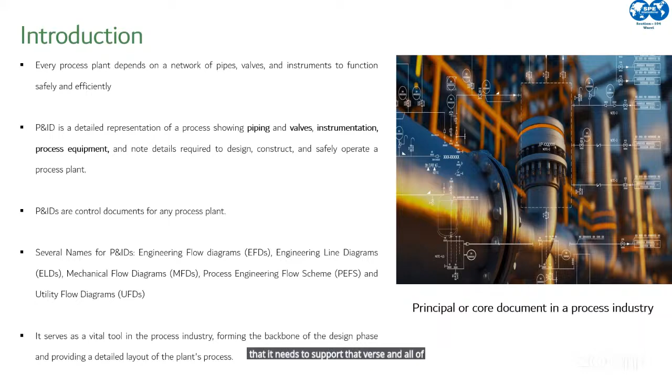One very important thing to note about P&ID is that they are often referred to as master documents, because if a change is made in a P&ID, every supporting discipline document may require revision. So most times in an engineering review, the process guy suddenly says we need to create an isolation valve for, say, a pump, and that changes your MTO, and changes what support the civil guy needs to provide for that valve. So they are master documents, like I've mentioned.

So when you talk about a P&ID, what kind of information do you find, do you include, do you hope to see in a P&ID?

So on a P&ID, you should be able to see basic operational and startup information, such as the normal operating flow path, and you're also able to see minimum flow protection.

Take, for example, on a P&ID, if you have a compressor, you're able to see a compressor anti-surge line. With regards to equipment capacity and rating as well, you're able to see what is known as an equipment tag number.

For example, if you have let's say 10 tanks, floating tanks, storage tanks in a refinery, on a P&ID you should be able to see tag numbers to differentiate them, like EK 101, 102, 103.

Also clearly on the P&ID, you're able to see the design pressure of equipment, what the operating pressure would be, the design temperature, the MDMT, the minimum design metal temperature, and also the maximum allowable working pressure where that applies.

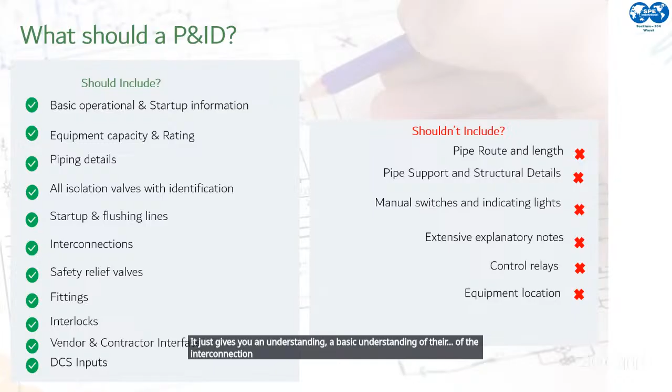So we're going to touch base on how important P&IDs are, and P&IDs are very much important in every aspect, from the design all the way to operation and maintenance of a plant.

During the design process, it helps coordinate interdisciplinary checks between process engineers and other disciplines, because this forms the basis for a line list - a line list that basically iterates all of the lines you have in the plant.

It basically tells you, oh, this line is coming from the inlet scrubber and is going to the heater. It helps as well doing HAZOP, what is known as hazard and operability studies, and also for safety reviews that are very critical to the design process.

For procurement, P&IDs provide control details, because from P&ID you're able to specify instrumentation and control details that are necessary for obtaining quotes. This information helps you in preparing what is known as a material requisition, or also a material takeoff. So they are very much important in procurement.

Doing construction as well, alongside other deliverables, they are very much useful in providing clarity, because even most times when you're constructing, few changes arise. You have, for example, a deliverable that has been approved for construction, and that deliverable is taken to site, and all of a sudden there are few changes that could arise.

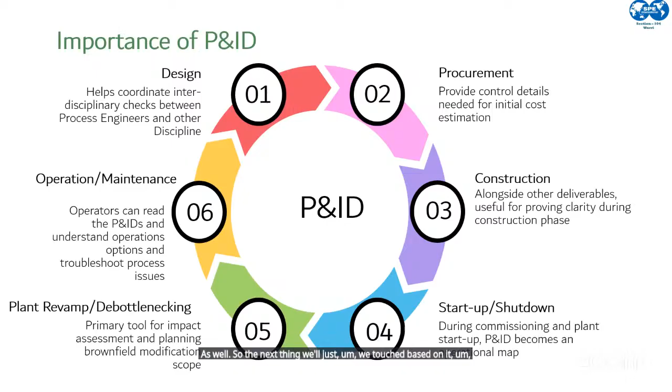So the next thing we touched on was communication, and why it's very much important. Most often than not, yes, the P&ID is a process deliverable developed by a process engineer, but it's not done in isolation. It's very much important as it serves as a communication tool where it brings the process, the mechanical, the instrumentation, and it brings everybody to the table, because P&ID is an input to every other EPC discipline.

For example, for a piping or mechanical engineer, it needs the P&ID to be able to develop a 3D piping model. It needs a P&ID to develop the ISO drawings that will be useful for fabrication and construction, and also the equipment and valve data sheets.

For a process engineer, we'll take feedback from the P&ID and create what is called a cause and effect matrix. For the instrumentation and control, it will develop engineering drawings and also the logic narratives, and we're talking about the input and output list. And then, just for time, the HSE will use the P&ID as an input into a hazard identification report.

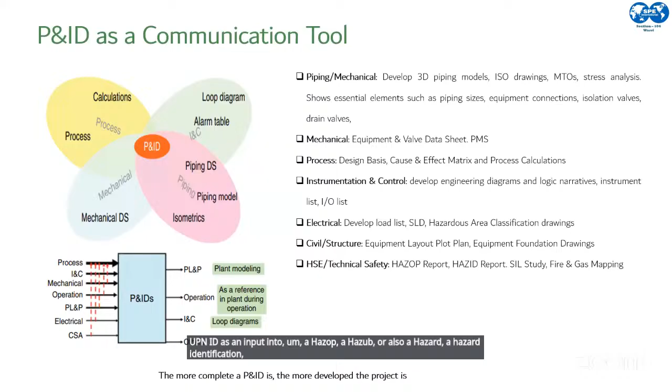So in terms of industry standards, the most common standard is the ANSI and the ISA, that's the International Society of Automation 5.1 instrumentation symbols and identification.

It's important to note that there are numerous standards, just as you can see from the diagram on the right-hand side, that are developed for creating P&IDs. So there is no generally acceptable universal standard. This is very important to note because most times you pick up a P&ID that is done by company A, and compare it against a P&ID done for company B, and you discover there is discrepancy, because even sometimes within organizations, within a company, P&IDs can look different from company to company.

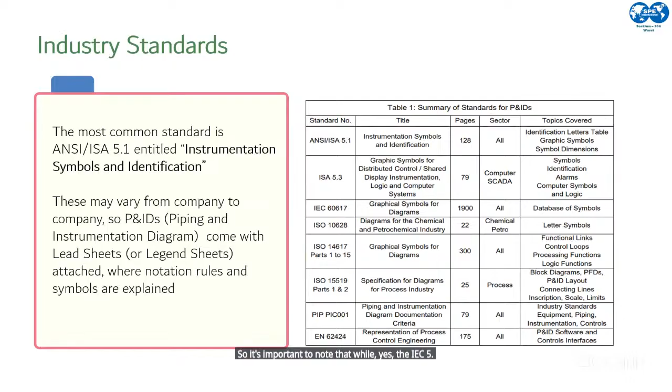Sometimes it depends on the type of software being used, or sometimes also the preference of the creator. For example, if you're using AutoCAD P&ID and you want to select a pump, it gives you different graphics to choose from, and I prefer pump A better, so I just pick that out. It's important to note that while ISA 5.1 is common, there are also numerous other standards as well.

So just to touch base on some process deliverables: before we get to P&ID, there is what is known as the BFD, called the block flow diagram. On the block flow diagram, major equipment, processes, or unit operations are basically just represented as blocks.

BFDs are very useful tools because they give you a feel for the process. Most times you use a BFD during conceptual design, trying to represent one or more process units, or trying to explain a process to management. It's very useful in conceptualizing new processes and explaining the main features of a process.

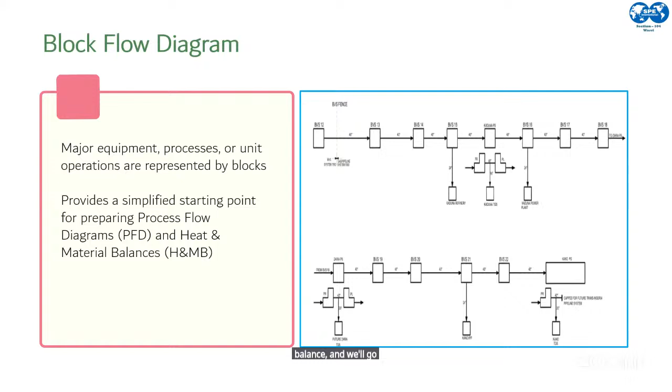It's very important because it provides a simplified starting point for preparing a process flow diagram, and also what is called the heat and material balance. Once you're done preparing that, you move to the next diagram, which takes in more detail, called a process flow diagram. A process flow diagram is a quantum leap in terms of the information provided compared to a block flow diagram.

On the process flow diagram, it shows the major relationships between major components in the system. The diagram on the right shows the absorption process with respect to sweetening. You have sour gas, which contains acid gases H2S and CO2, and you pass that into the absorber. Then you pass in what is called a liquid desiccant, in this case lean amine, which has a countercurrent interaction with your sour gas and takes out the sweet gas from the process.

So that's just a PFD. It just shows your major process parameters and how they are going to be controlled, showing your major groups majorly. On the PFD, you're also able to see your stream information.

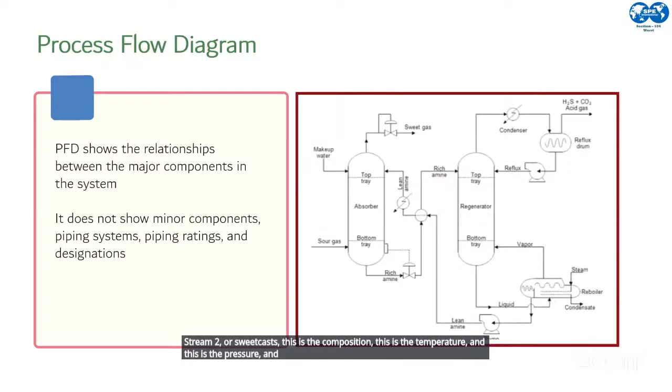Sometimes streams are represented as 1, as 2, and that also helps you develop your heat and material balance, because it tells you the sour gas comes in at a certain temperature, pressure, and composition, and by the time it comes out as stream 2 as sweet gas, it has its own composition, temperature, pressure, and other information like that.

So just to bring everything home: you have an example here of a heat exchanger, E1. On the BFD, it's shown just as a block, like I've explained. When you take that information further as a process flow diagram, you're able to see an icon that basically represents the heat exchanger E1.

When you take that further into what is known as the piping and instrumentation diagram, you're able to see the drain point, the 12-inch isolation valves upstream and downstream of the heat exchanger, the PSV (pressure safety valve) set at 150 psi, and the tailpipe with a 6-inch valve that is car-seal open.

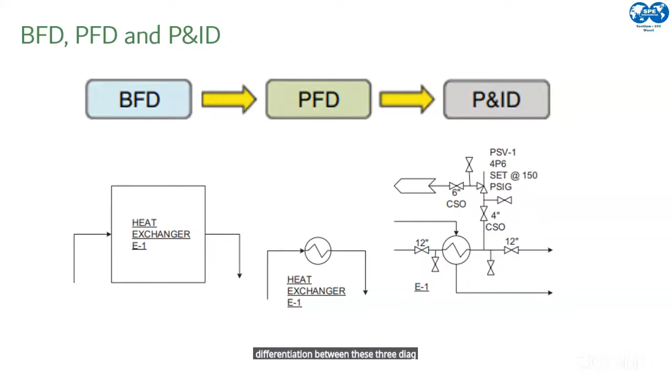So all of that information gives you a systematic differentiation between these three diagrams. Now let's try to make sense of the difference between a PFD and a P&ID, because this point is very important to note.

Just to confirm, I've not lost the audience, right? You guys can still hear me?

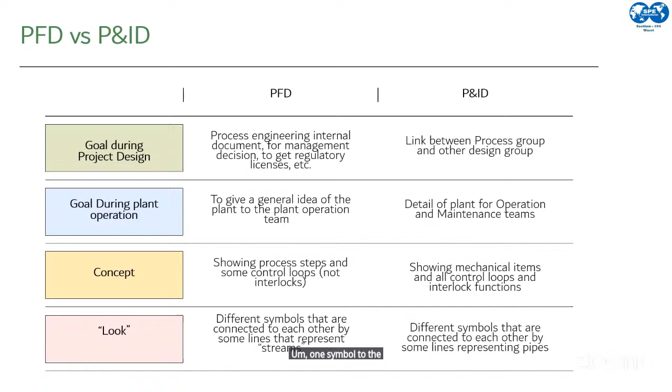With respect to P&IDs, there are different types of P&IDs. It's very much important to note this because most often than not, if this is not well understood, it makes reading a P&ID very much difficult.

So one thing that is very important before you jump into reading a P&ID - take your Google Map for example, it's quite intuitive, it tells you turn left, turn right at 400 meters, do this. So for every P&ID, there's what is normally known as a legend sheet or a legend P&ID. It basically just shows you each symbol used on the P&ID, as well as abbreviations.

Sometimes you see certain abbreviations written against equipment or on lines on the P&ID, like FO or NC. FO will mean fail open, FC will mean fail close, normally closed, and things like that. So it's important to consult the legend P&ID because it clearly shows all of the symbols used. Mind you, different organizations have different symbols, so by consulting this, you're able to know what the symbols mean without guessing.

There's also what is known as the typical details P&ID. Most times, in a very large refinery or plant, you happen to have, let's say, a drain point, and that appears in like 100 places. You don't want a scenario whereby you repeat that so many times that it takes up so much space, because the P&ID is meant to be kept as concise as possible, not crowded. So sometimes you have a typical details P&ID used for consistent arrangements - you repeat it once, and every other occurrence of that arrangement just refers to that typical details P&ID.

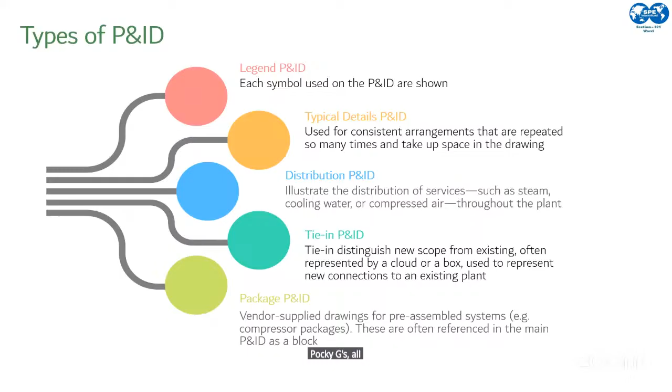Then you have what is known as the package P&ID - these are vendor supplied packages, such as gas dehydration units and compressor packages. All of these are represented on the package P&ID.

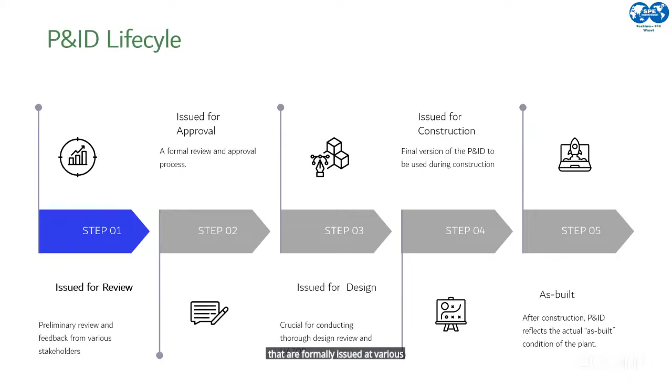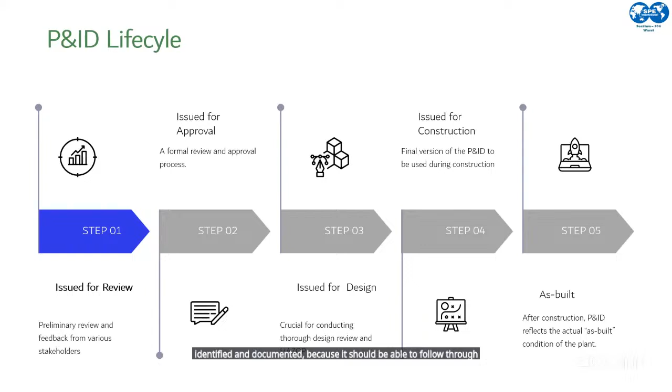So we'll move on to another detail, which speaks to the P&ID life cycle. It's very important to understand that P&IDs are designed in steps. They are controlled documents that are formally issued at various stages, because changes made to the P&ID need to be identified and documented, following a formal process. This occurs several times in the course of a project.

The first stage of issue of a P&ID is known as 'issued for review,' sometimes also called 'issued for planning.' At this stage, you have preliminary review and feedback from various stakeholders, from the client. For example, an EPC - an engineering, procurement, and construction firm - submits a P&ID to the client, and the client reviews that.

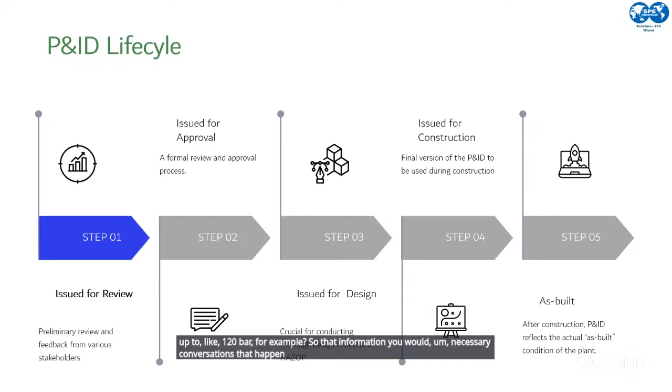At the end of that process, after the client has reviewed the IFR version of the P&ID, they basically do what is called a markup. They mark up the P&IDs with their thoughts and their requirements.

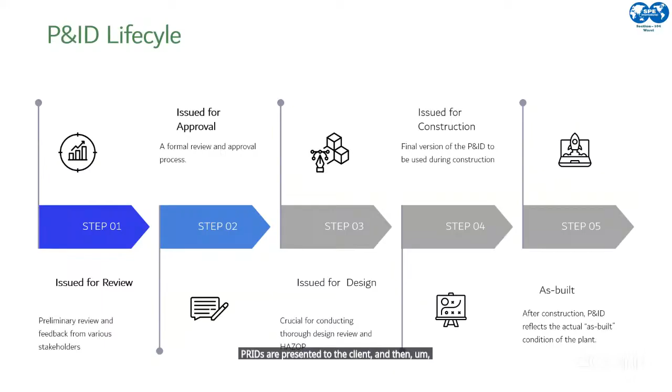The engineering firm will now go ahead to implement or address the client's recommendations or comments. But it's important to note this is not just a process where the client says jump and the engineering firm jumps. Sometimes that comes with conversations, suggestions, and a lot of back and forth. At the end of this process, the P&IDs are presented to the client, and the client approves them, and then it goes on to the next stage, which is issued for design.

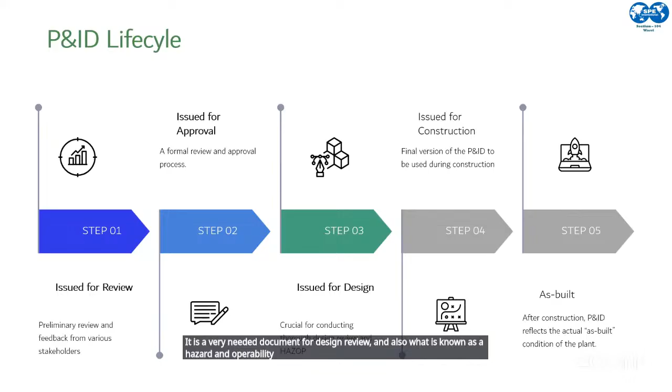The issued for design is crucial because it's a needed document for design review and also what is known as a hazard and operability study. The P&ID at this stage is used to identify potential hazards and operational issues that may arise, to ensure the plant is safe.

Most times this P&ID is subjected to a third-party review. You get a HAZOP certified chairman that comes in to review your P&ID. At the end of the process, you get recommendations, such as you need additional safety valves, or you need to change the piping spec.

Also at this stage, it's important that all of the vendor information they are going to be getting from the vendor should have been available.

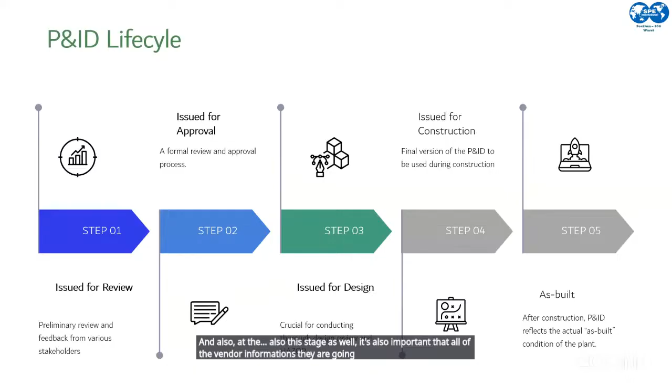The next stage is issued for construction. This is the final version of the P&ID that will be used during construction. The P&ID at this stage is what is now used to build the plant according to the approved design, so it's a very crucial document to ensure the plant is built accurately according to design specifications.

As I mentioned earlier, during the construction phase there might be changes that happen, and those changes need to be properly documented, because most times they might force other engineers or contractors to redo their work, sometimes causing delays and variation or additional costs.

So the next P&ID, the last step, is what is known as the as-built P&ID. Some organizations call it issued for record.

After construction is completed, the P&ID is updated to represent the as-built condition, as the plant is built, at the end of construction. So it serves as a record of the actual plant configuration, and this information is now what is used for maintenance and modification.

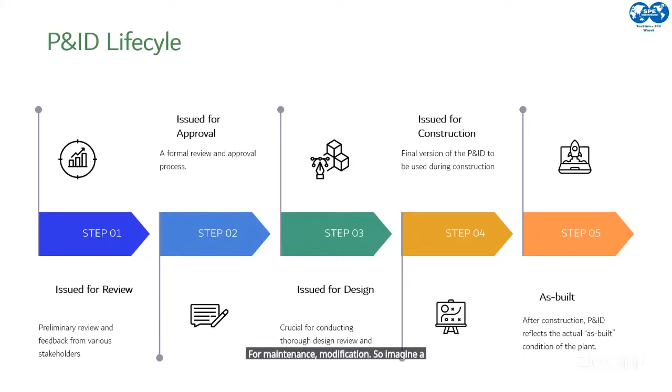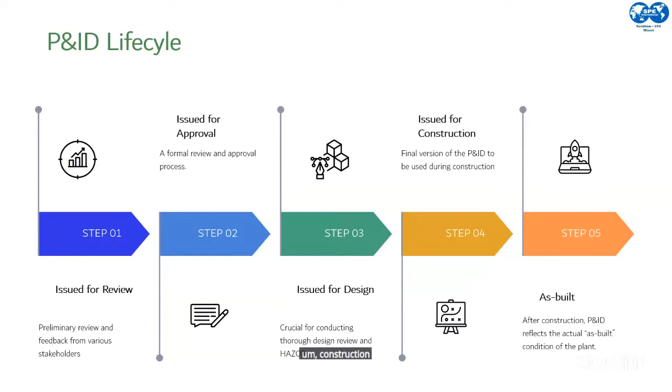Imagine a scenario where the as-built is not documented, and someone wants to operate the plant and picks up the issued for construction version. All of a sudden you find out that this valve that is being shown on the P&ID is not there, only to realize later that during the construction phase, they discovered it was no longer needed and took it out.

So before we go, what are some of the key considerations that I want participants to take out of this lecture with respect to these key considerations.

Number one is that P&ID is a conceptual drawing, right? And what that means is that it is not drawn to scale, it is not drawn as to geometry. However, it should represent reality as much as possible. What I mean by that is basically, for example, I have a 12-inch valve connected to, say, a tank that can store 10,000 liters of crude. While designing my P&ID, I will not draw the valve to be as big as the tank, right? But I also will not draw it according to scale because it's a conceptual drawing.

Another thing, which is with respect to documentation, this is very, very key. All changes should be properly documented, including the reason for the change and the date of the revision. Why this is important is because just imagine if you are a piping engineer and you pick up an old P&ID that is not up to date, and you spend, let's say, 2,000 man hours developing isometric drawings, only to find out in the process that it's an outdated document that the process engineer sent to you. In local parlance, you will tear somebody's shirt, right? So changes should be documented. It's important that P&IDs undergo what is known as a management of change, a proper management of change process.

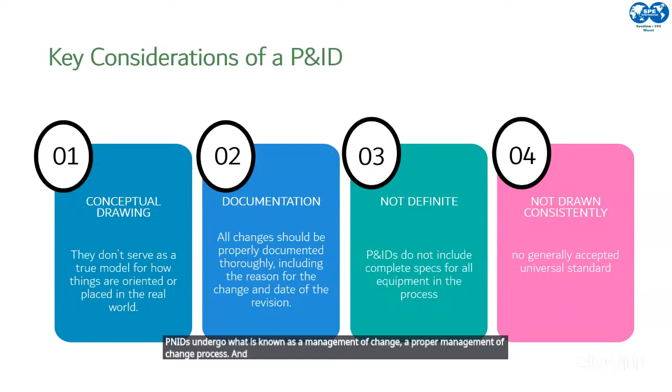And thirdly, it is not definite. They do not include complete specs for all equipment in the process. So even though P&ID has information relating to a plant, they do not contain all of the necessary information. Even though it's useful for operation and maintenance, I will not rely on the P&ID alone. I will pick up, for example, a control and operating philosophy deliverable, and other documents as well, very much important.

Also, they are not drawn consistently. They might appear differently based on the internal standard software system and also the creator's preferences. So if you pick up a P&ID and you see that P&ID A is different from P&ID B, it doesn't necessarily mean that either of them do not know what they are doing. It depends on the standards which they have adopted.

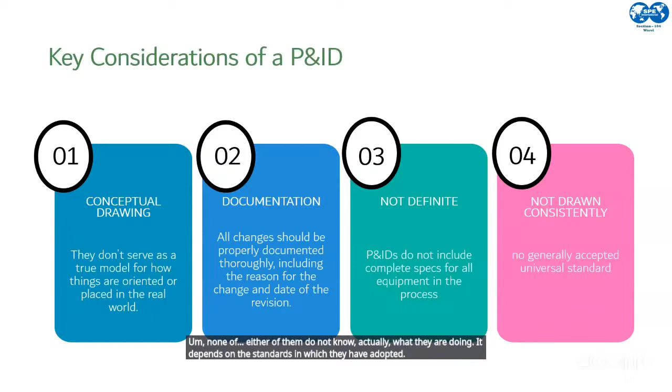So a takeaway: avoid what is known as the Piper's trap. This is oftentimes a struggle between a process engineer and a piping engineer, although we're very good friends anyway. Sometimes a process engineer is saying, I see 6, and a piping engineer is saying, I see 9. I'll leave that to the audience to tell me who is correct. But process will ask a piping engineer, why didn't you design it like the P&ID? And the piping engineer will say, oh, the P&ID is just a conceptual drawing.

An example of this is on the P&ID you have a drain, shown basically, in layman terms, to take out liquid from, say, your filter separator. That is shown at the bottom of the vessel on the P&ID. But in reality, the piping engineer has designed that to be routed upward when normally it should be routed downward, because you want to utilize gravity to drain out the content in your filter separator. So if it is routed upward, the liquid will get trapped. And then the process engineer is saying, why did you design it this way? And the piping engineer is saying, I designed it just like the P&ID showed, right?

So for example, you have on the P&ID a control valve placed correctly in line, but actually in the layout, it is located between a pipe rack beam where you have a lot of beams, and there's no space to even remove the actuator, to even operate the valve. That's going to be an operational nightmare. So it's important to note that at every given point in time, the principle in developing documents should be to preserve process intent while ensuring that physical feasibilities are always respected.

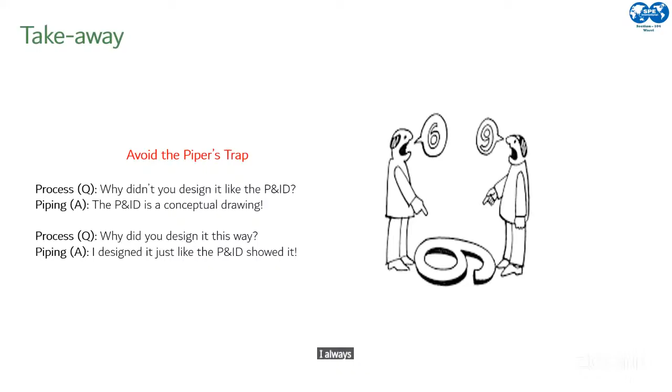I think the first thing is for us to also remember that the piping and instrumentation diagram is a representation of your plant, of your facilities, and it shows your valves, it shows your equipment, everything. And I believe we've learned a lot. So I don't want us to just go home with all our questions on our mind. So we'd like to take our questions now. If you have a question, kindly raise your hand or drop it on the chat box and then I read it out for him to answer.